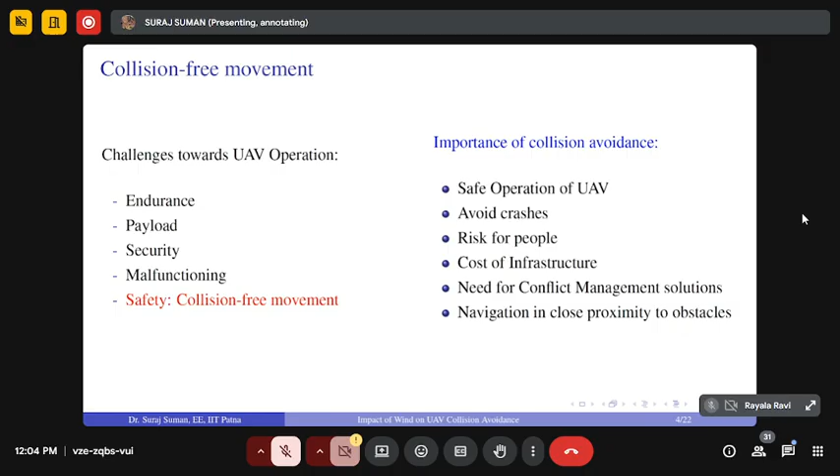Then again, it may be treated under a law and order situation, and this is a kind of conflict. Then navigation is in close proximity to the obstacles so that we can have more efficient trajectories and paths. So what is a basic collision avoidance mechanism?

So let's suppose some UAV is moving and some obstacle is there, which may move or may be static. In order to have collision avoidance, what should be there? Just assume that you are riding a bike and you have to take a turn. The turn may be due to construction on the road or due to something coming from your front. Based on that, you have to take turns so that you can ensure your safety as well as your vehicle safety, and whatever work you are doing is also ongoing.

So what will you do? Just think that you are sitting on the bike at some higher speed, let's suppose 60, 70, and you have to take a turn. If your speed is higher, then it requires a larger distance to take the turn. If the speed is zero, then you can take a 90-degree turn also. But if the speed is higher, it requires sufficient distance, or some safe margin, to take a safe turn.

And again, the turning angle is also important, because if you don't make a turn with some particular angle, then possibly you may collide or go out of the road. Using this analogy, you can apply the same in the context of UAV. Let's suppose a UAV is moving and some fixed building is there. Consider two scenarios: the UAV moves at 5 meters per second towards this building, and in the other at 20 meters per second.

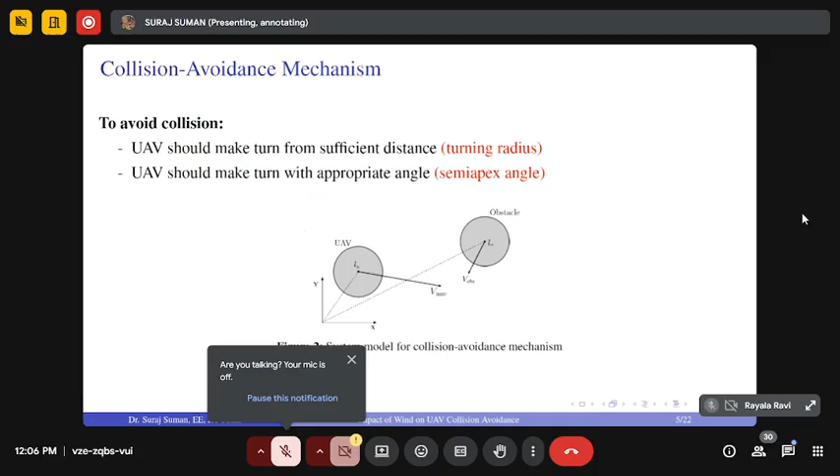And the other one is the semi apex angle, so it should take the turn at a particular angle so that it can have a safe trajectory. Each of these parameters, turning radius and semi apex angle, will depend upon the velocity of the UAV as well as the velocity of obstacles. In some cases the obstacle may be static or it may be moving.

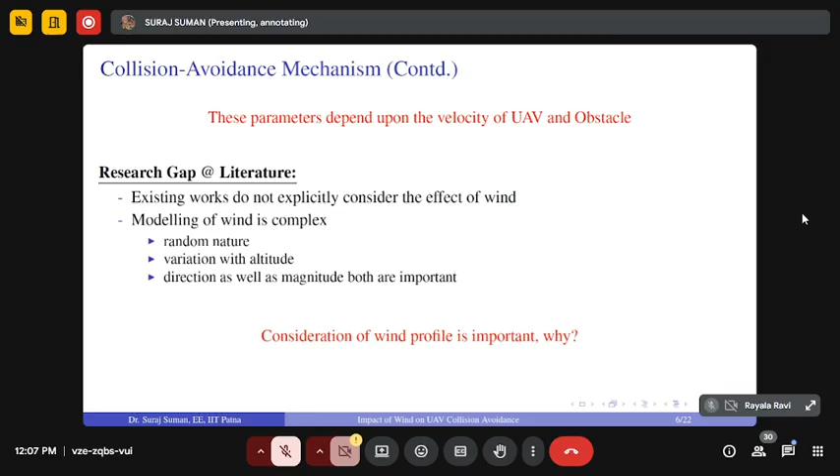If you go to the literature, you will find that existing work does not consider the effect of wind, because modeling of wind is very complex. It is random in nature, varies with altitude, and both direction and magnitude are important. So we have noted that consideration of the wind profile is very important. Let me explain why. We have considered the data of two cities, Key West, located in Florida, and Medford, located in Oregon.

You can see the wind speed and wind direction; since wind is a vector, it has a speed as well as a direction. Both speed and direction vary significantly; it is not static. This is month-wise variation. You can see it can go up to 6 or 7 meters per second wind speed, whereas the typical UAV speed is around 5 to 15 meters per second.

So if the UAV is moving at 5 to 15 meters per second and wind speed is around 7 to 8 meters per second, then you cannot ignore the effect of wind speed, because relative velocity comes into the picture when you account for the overall effective velocity of the UAV.

And again, the wind direction also significantly varies. So you can see that it can vary from like 45 up to 170 degrees, something like that. Month-wise variations are quite different.

So how this direction will vary matters, because if wind and UAV both move in the same direction, then you can have a different overall effective velocity. If they move in perfectly opposite directions, then the effective velocity is different, and if at some angle, then the overall effective velocity will be different. So that's why this wind speed and wind direction are very important.

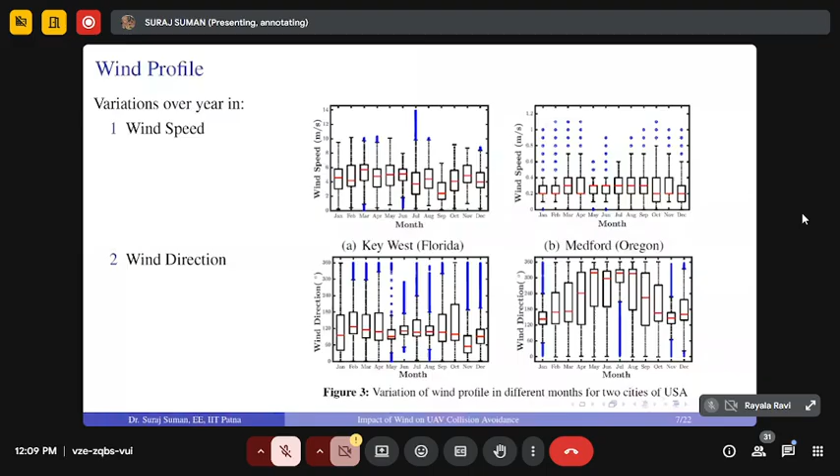And you can see that the speed is significantly higher, and this is almost comparable to the mobility of the UAV. So that's why it is very important to consider. Fine. Now, what is the effect of wind on UAV movement? So suppose you consider wind as wind velocity Vw and take its two components along the x and y axes, Wx and Wy. You take the projection along x and y, and then you can find the velocity along the x and y axes.

Fine. So now what is happening? Suppose the UAV is moving with a speed Vu in direction omega at a particular given altitude; then you can also find the x and y components of the velocity of the UAV. Now, how will you find the effective velocity of the UAV? The effective velocity Ve is nothing but the velocity of the UAV plus the velocity of the wind. If you add them, you get the effective velocity.

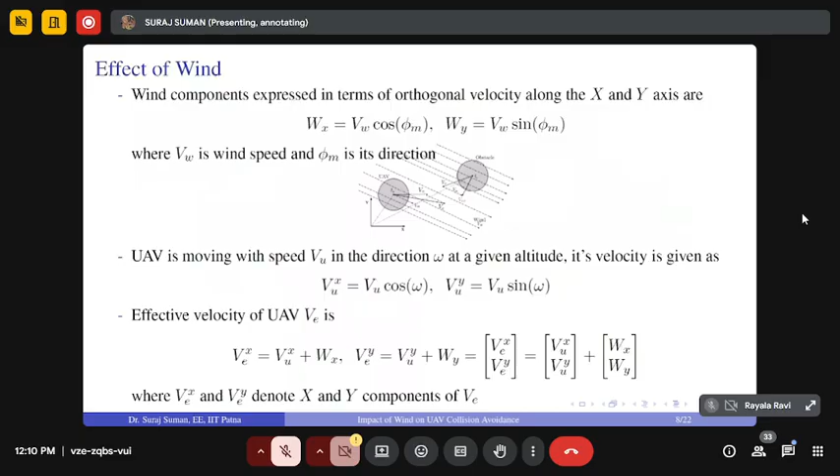Fine. Now, just come to this system model. We have two parameters, the semi-apex angle and the turning radius, so we have to model them. Suppose we have modeled this UAV as a sphere of radius d1, so a sphere of radius d1 denotes the UAV, and you want its safety. And suppose some obstacle is also there, also of the same radius d1. You can use d1 and d2, but for the sake of brevity, we have taken d1 and d1.

So in the ideal scenario when there is no wind, whatever the movement direction of the UAV is, that will stay the same, because wind is not there. And if you consider the case when wind is there, then due to the presence of wind, the effective velocity of the UAV will change, and that is VE. So, let L naught and LU, as you can see in the right side figure, be the locations of the obstacle and UAV respectively.

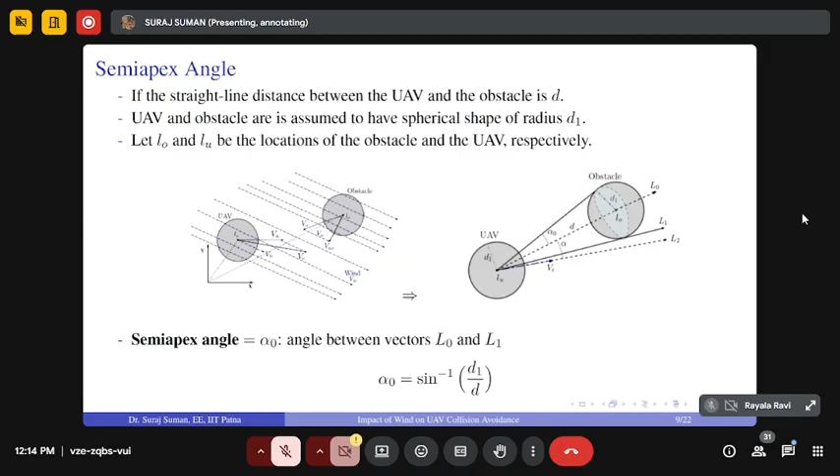So here we have obtained the semi-apex angle alpha naught in absence of wind. Means if wind is not there and UAV makes a turn at alpha naught, then it can safely cross the obstacle. Fine. Now consider the case when wind is present. Then what will happen? Then it is not alpha naught. Then it has to make a turn corresponding to alpha angle. So alpha angle is the semi-apex angle in presence of wind, and using dot product you can find it like this. Fine.

So now there can be two possible cases. Let's suppose if alpha is greater than alpha naught, then UAV makes a turn with angle such that it can avoid the collision. So if alpha is greater than alpha naught, then it can avoid the collision. But if alpha is less than alpha naught, then collision is sure, means UAV leads to collision.

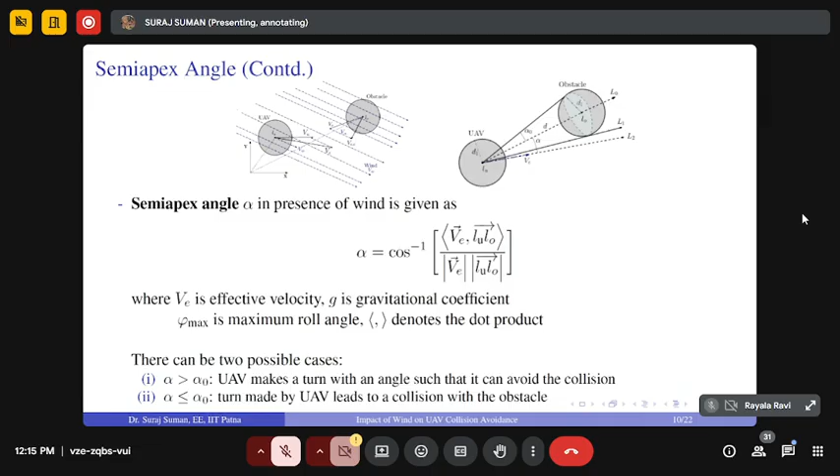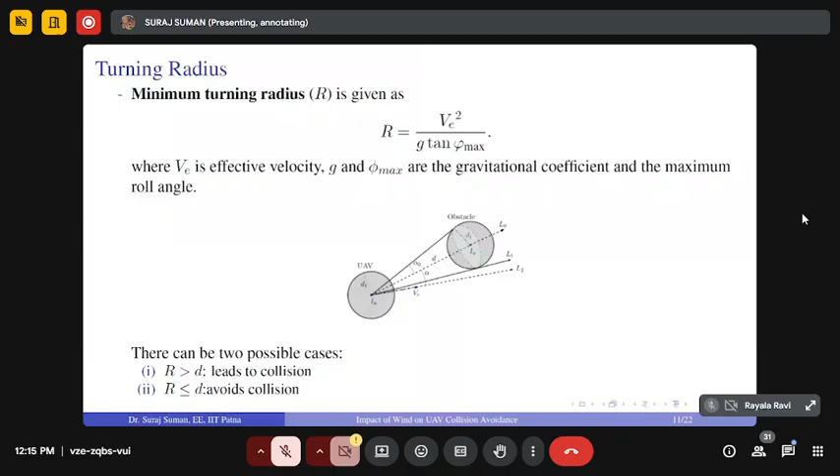Fine. Next, what is turning radius? So turning radius is obtained by this, where v is the effective velocity, g is the gravitational coefficient, and phi max is the maximum roll angle. So there can be two possible cases. If you consider r greater than d, so if turning radius is sufficiently higher than the distance between UAV and obstacle, then it will lead to collision. Fine. But if turning radius is less than d, means your distance between UAV and obstacle is very high, then basically it will avoid collision. Fine. So there are two cases.

Now if you summarize them, we have two parameters: semi-apex angle, that we have obtained in case there is no wind, that requires alpha naught; in case of wind it is alpha; and the turning radius, which depends upon v, and v is nothing but the effective velocity of UAV, which accounts velocity of UAV as well as velocity of wind. Fine. Now try to understand, there are different cases based on these two parameters.

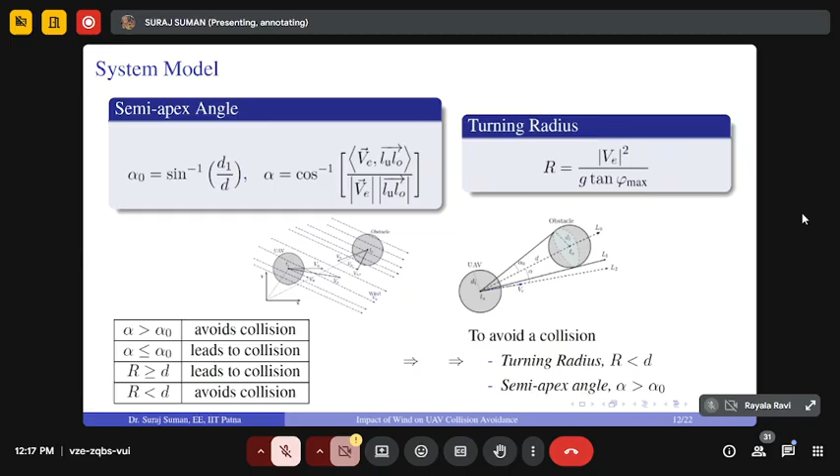So as we discussed previously, if alpha is greater than alpha naught, then it will avoid collision, whereas if alpha is less than or equal to alpha naught, this will lead to collision. Fine. If r is greater than d, then this will lead to collision because there is no sufficient distance between UAV and obstacle so that it can make a safe turn, and if r is less than d, then it avoids collision. Fine. So to avoid collision, what is the key criteria? The distance between UAV and obstacle d should be sufficiently higher than turning radius, and semi-apex angle alpha should be greater than alpha naught.

Fine. So based on these two basic requirements, now we have to model this turning radius and alpha. r and alpha both depend upon the effective velocity of UAV, and effective velocity of UAV depends upon the velocity of wind profile, and finally wind profile is a random process, so r and alpha are also going to be random.

So now, since wind is a random process, it is very difficult to analyze, and capturing the variation of wind data through some well-known distribution is very difficult because it strongly depends upon the geographical location and rapidly changing weather conditions. Then wind has magnitude as well as direction, and modeling only the wind speed or only wind direction will not work. So now the question arises that R and alpha are random in nature, then how to model them? Because if we model R and alpha, then only we can model the collision avoidance mechanism.

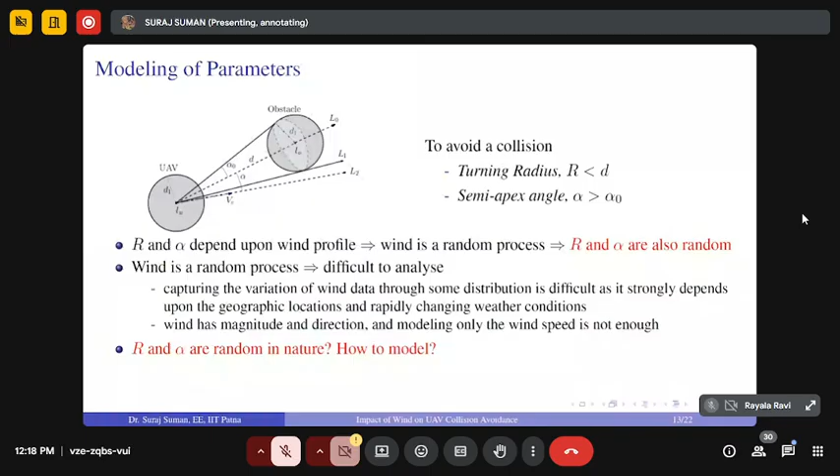Fine. So for this purpose, we have used the wind data of last 4 years, and that is downloaded from National Renewable Energy Laboratory. This is NREL, USA, and the resolution of data was 5 minutes. Fine. Then we have used discrete time Markov chain to model these two parameters, turning radius and semi-apex angle. Fine.

Now, what is happening with this DTMC? DTMC will provide the steady state PMF for R and alpha, and we will use that particular PMF to find the collision avoidance probability.

So this is one illustration of DTMC to find this semi-apex angle PMF. Let's suppose, that is what we are doing: we are taking the wind data of different samples, then corresponding to each sample we are finding the alpha. And for all the wind samples we are finding the corresponding alpha. If alpha lies between alpha min and alpha max with a step size of delta, then we can have ns number of steps in the discrete time Markov chain, and you can find ns as follows.

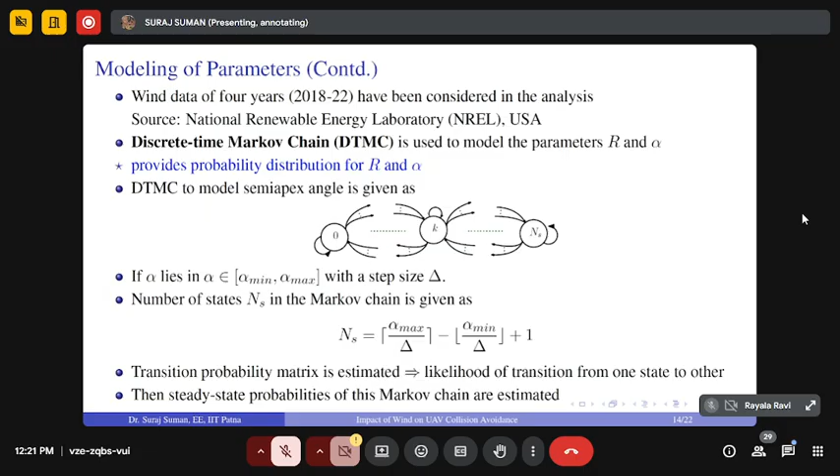So we have illustrated how to find this semi-apex angle using the DTMC model. In the same way, you can find the distribution for this turning radius using DTMC. Now you can see the results. Omega is the direction of UAV.

So probability of collision avoidance varies significantly with the direction of UAV. Let's suppose here we have considered distance d between UAV and obstacle is 40 meters, and d1, meaning size of the sphere, is 1 meter, and UAV is moving with 10 meters per second. Then with the data of three cities of USA, Medford, Denver, and Key West, we have obtained the probability of collision avoidance along this omega, meaning direction of UAV.

You can see that this varies significantly, because as the direction of UAV changes, the effective velocity of UAV changes, and that significantly affects the probability of collision avoidance, because the alpha and R parameters will change accordingly and PCA will change. So that's why you can see that significant variation is there.

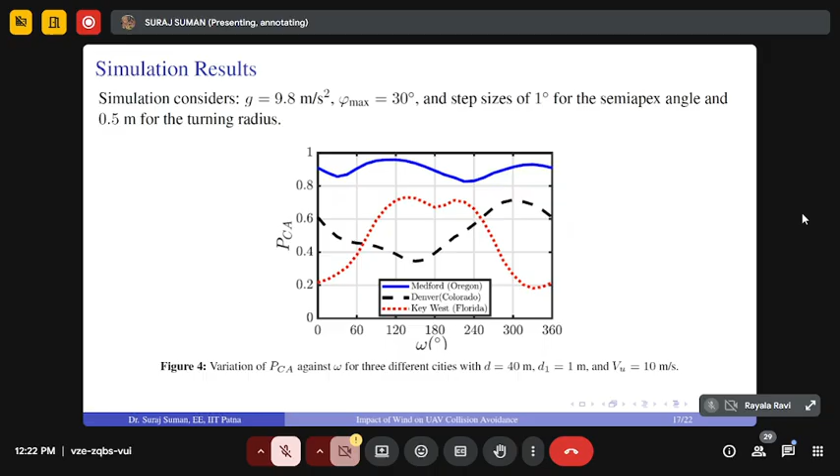Next, variation of PCA against D, where D means the distance between obstacle and UAV. You can see that as you keep increasing the distance, probability of collision avoidance increases, because as distance is larger, the UAV gets sufficient safe margin, safe distance to make the turn. But as distance is low, then it is very difficult to make a safe turn.

So you can see that if distance is 30 meters for the data of Key West, then its probability of collision avoidance is only around 0.25, which is very low. But if you increase the distance to around, let's suppose, 50 meters, then it is around 0.8. And if you go to significantly higher distance, then again it will increase.

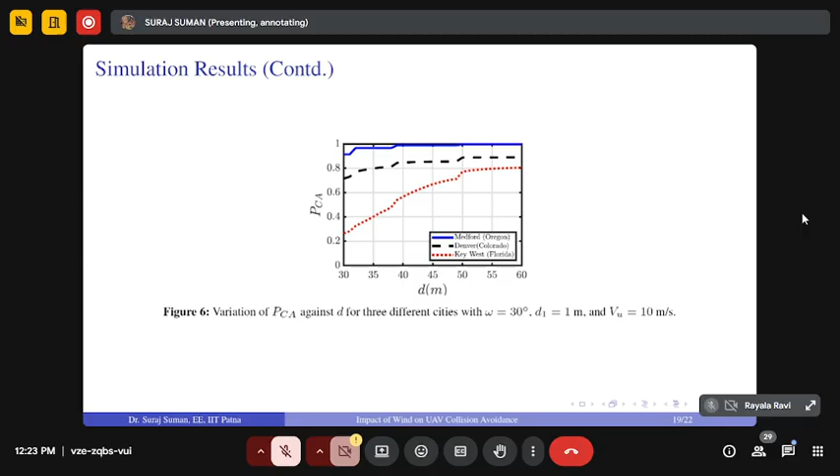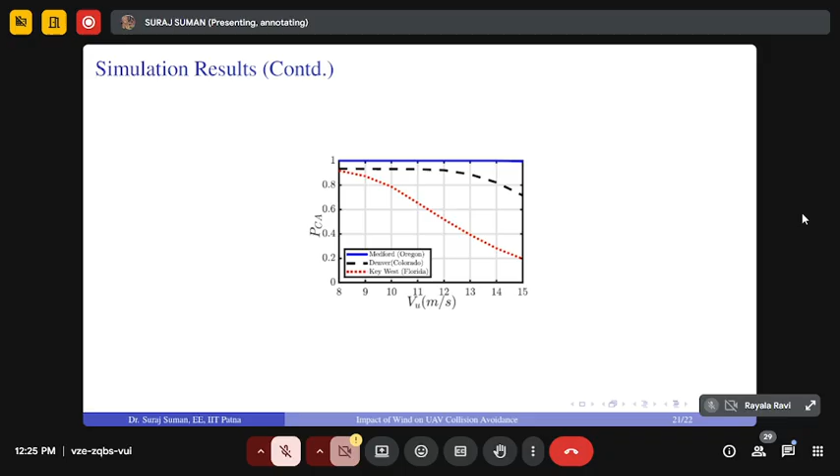Now the next one is the variation against the speed of UAV. As we increase the speed of UAV, probability of collision avoidance decreases significantly, because the increase in speed of UAV and the effect of wind both combine and have a significant effect. In all the figures, the red one has a more severe impact. So the wind profile of Key West is very significant and severe, and it is comparable to UAV speed, that's why it is affecting severely.

So here are our concluding remarks. We have proposed a framework to incorporate the effect of wind, and we have modeled the probability of collision avoidance using the DTMC. Ignoring the effect of wind will lead to inaccurate system design, which may have very severe consequences in real life deployment. The UAV must be aware of its direction, along with speed and the wind profile, while making the turn to avoid collision.

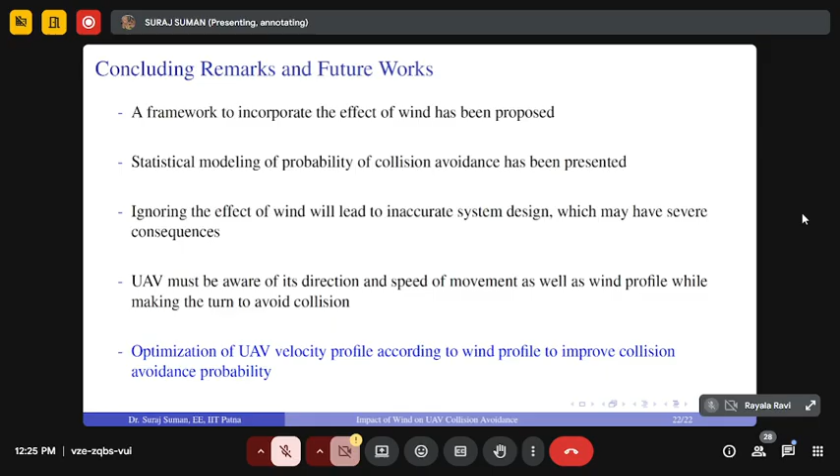Next, we want to optimize the UAV parameters so that we can further improve the collision avoidance probability. So this was all about my presentation. If you have any doubt, you can ask.